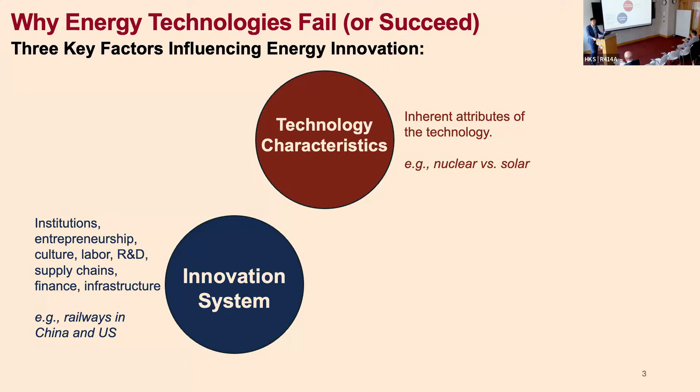That's the first factor. But people can also say that even for the same technology, sometimes one technology works in one country but doesn't work in another. This comes to the innovation system—different institutions, different culture, different supply chains, different financing situations, different infrastructure. One example is the railway system in the United States versus China. People ask why this is, and you can see the difference is different population density, different resources, different infrastructure.

The third factor is public policy. Policy also matters—it depends on what regulations or incentives you can give to people. One example is the development of solar panels. We have to go back to the 2000s and think about one policy that was really important for solar panel development: Germany's feed-in tariff policy, introduced under their Renewable Energy Act. Basically, it gave solar developers guaranteed revenue.

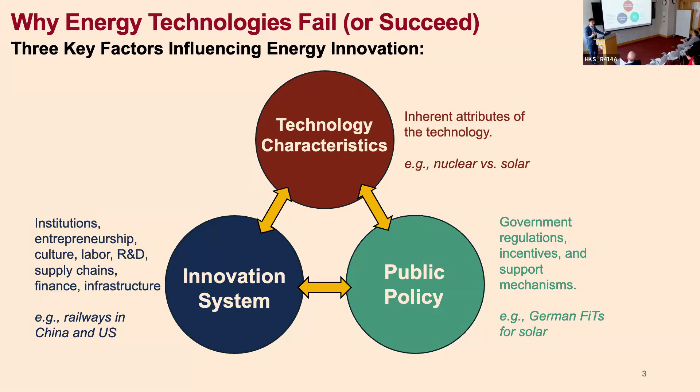When people think about the whole of energy innovation, they're usually talking about the interactions between these three key factors. What I'm going to do today is really simple: tell people a story about nuclear power. I'm not an expert on nuclear power, but rather I'm approaching this problem from the energy innovation perspective.

Speaking of nuclear power, here are some highlights showing this is a hot topic. There is growing interest in nuclear power from the traditional nuclear players. I think nuclear power is one of the few things that gets bipartisan support in the United States, and a lot of new legislation and policies are coming out. In France, the government wants to build six more new nuclear power plants, and you can see the same thing in Japan and South Korea—a lot of traditional players thinking about nuclear power resurgence. On the other hand, you see a lot of emerging countries either building their first nuclear power plants or considering building their first nuclear power plants.

And also besides the public sector, you see a lot of interest from the private sector, especially driven by the demand from AI and also the data centers. Like Microsoft is seeking to reopen the Three Mile Island power plant to power their data center. And Amazon, Google, they are investing in small modular reactors to power their data centers. But anyway, I'm trying to say this is a hot topic, and there is growing interest in nuclear power.

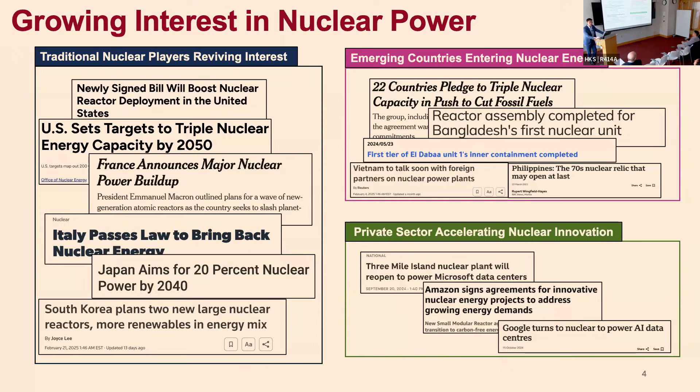But on the other hand, nuclear power is always a debatable issue. A lot of things we can debate, right? We can debate on its safety. Do we want another nuclear accident, a disaster? And other people can argue that the nuclear accident risk is actually pretty low and it's declining because the technology is improving. And what's the role of nuclear power in grid decarbonization?

Some people will argue that nuclear power is cheap, it's a firm resource, it's reliable. But other people can say we can totally do decarbonization without nuclear power. And also its cost and its construction time. Some people will argue that it's really expensive to build nuclear power plants in the United States today. But other people will say, if you have regulatory stability, if you can do standardization, you can make it cheaper and build it faster.

And also on nuclear waste, we still don't have any permanent solution. But people can argue that this is totally manageable and you only have a relatively small amount of waste. A lot of things we can debate, but today I'm really going to focus on the economics of nuclear power. The reason is, I think people have a consensus that the fundamental barrier for nuclear power today is its cost. It's too expensive. I have a quote here from MIT's The Future of Nuclear Energy studies. Their conclusion is the fundamental problem of nuclear power today is its cost. So my talk today is really going to focus on the cost of nuclear power.

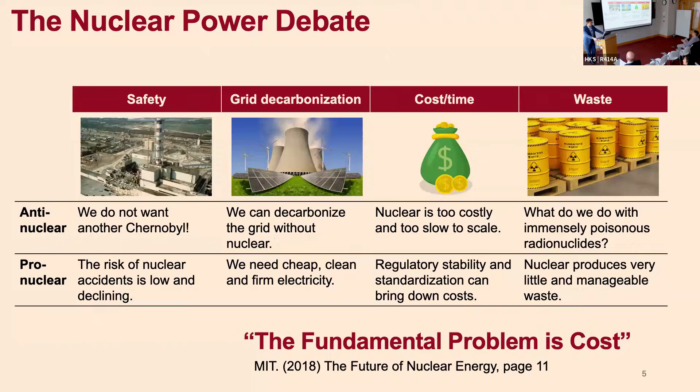Speaking of the cost of nuclear power, it's a form of electricity. And when we talk about electricity's cost, we usually use the LCOE, the levelized cost of electricity. What I'm showing here is a classic equation to calculate the levelized cost. Basically, you have the capital recovery factor and construction cost, operational cost, maintenance cost, fuel cost, and divide all costs by the electricity produced. For nuclear power, its operational, maintenance, and fuel costs are relatively stable. And electricity production is also pretty stable because it's usually used as base load with a high capacity factor. So what really matters in this equation is the construction cost.

And the construction cost can be divided into two parts. The first part is basically everything except the financing cost. People call that overnight construction cost. And the second part is the financing cost, the interest during construction, which depends on your construction time and interest rate. So today my talk will basically focus on the overnight construction cost. And I will also discuss something on the construction time.

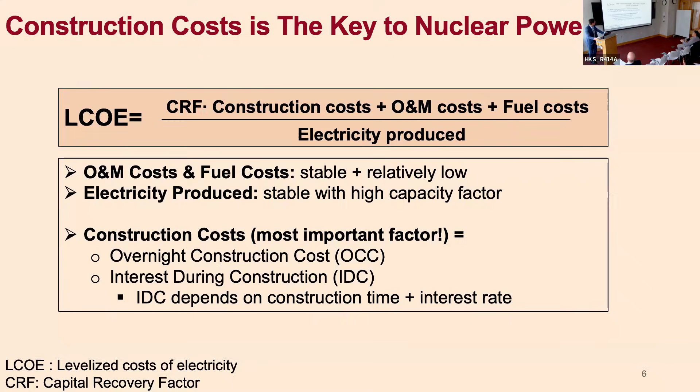The reason why construction cost is a problem is because historically we have observed an interesting and concerning fact, which people call the cost escalation curse of nuclear power. With a lot of technologies, like solar, wind, batteries, electric vehicles, when you build more, you can build cheaper. But nuclear technology is very different. Historically, when you build more nuclear power plants, you build them more expensive.

What I'm showing here is the overnight construction cost of nuclear power in the United States. And you can see the cost increased dramatically over time. This one is Vogtle, the two nuclear power plants commissioned last year in the United States. It's very expensive, about $15 per watt. One thing I want people to notice here: the cost increase happened before the Three Mile Island accident, and it increased dramatically after the Three Mile Island accident.

The reasons for this cost escalation in the United States: the first is, it's very interesting, it's a fragmented market. Every nuclear power plant in the United States is built differently, so basically a lack of standardization. The second thing is the labor cost and the material cost were increasing over time. The labor productivity is decreasing over time. And for the material part, if you build a nuclear power plant, you need a lot of steel, a lot of cement. In many cases, you need special steel and special cement for nuclear power, and that special steel, cement, concrete is getting more and more expensive over time. Another thing in the United States is the regulation.

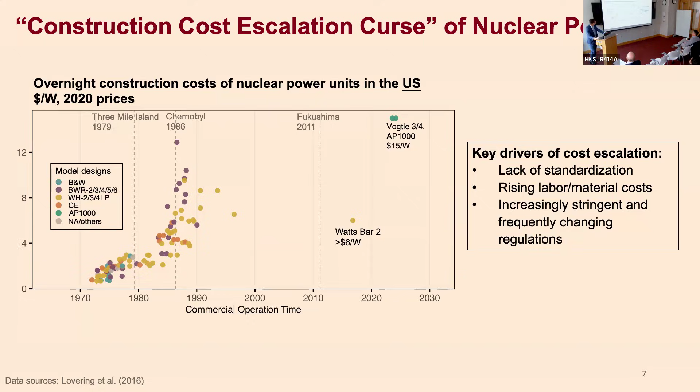And why are they switching to more expensive models? One thing is that nuclear power plants get larger and larger, and simultaneously more and more complicated. One reason it got complicated is that the French company introduced the technology from Westinghouse, and that's US technology. And they wanted to give it some French style, to make it more innovative. And when you make it more innovative, you make it more complicated and increase your cost.

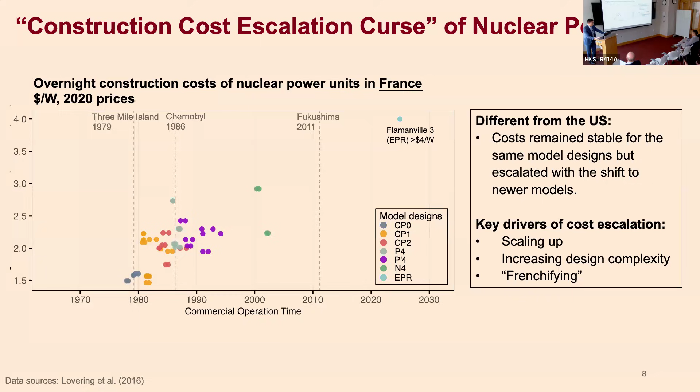So the problem here is we have observed this cost escalation problem. And the debate is: is this a technology problem, or a policy or innovation system problem? Remember the three factors here. I think this debate is really important because if this is an inherent nature of the technology, like nuclear power is a bad technology, what we should do is redesign the technology. And if this is more a policy or innovation system problem, that's another direction. We should redesign the policy and innovation system.

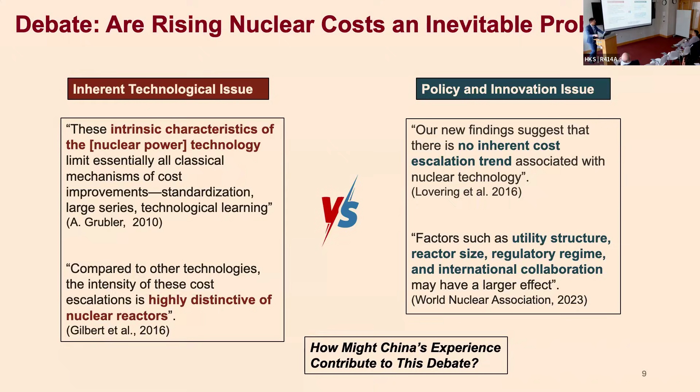And when I look at this debate, what I'm thinking is that maybe China's experience on nuclear power can contribute to it. The reason I think the Chinese experience is valuable is not only because I'm Chinese, but also if you look at the recent nuclear power expansion, the left figure shows global operating capacity since the 1970s. You can see the largest country today is the United States, the second is France, the third is China. And most countries actually stopped building nuclear power plants after the 1990s.

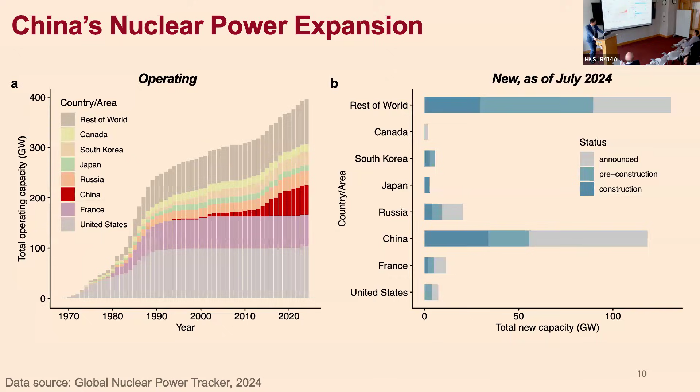And China is the only country that has substantially expanded its nuclear power capacity over the past two decades. The right figure here is new capacity. You can see China is constructing a lot of nuclear power plants, and a lot are in the pipeline. So I think it will be pretty interesting to think about what happened in China. Is there any cost escalation in China?

Before I go into any detail, let me tell you my data source and methodology. Collecting cost data for nuclear power is challenging everywhere, and it's basically impossible everywhere to get third-party audited data. People usually rely on gray literature, like news reports, to get the data. That's how people get the data for the United States and France. And I do the same thing for China. The advantage is I can read Chinese, so I have a lot of sources.

So basically, I use a lot of data from news, industrial reports, and statistical yearbooks. I actually get a lot of data from environmental impact assessment reports, because before nuclear power plants start construction or operation, they need to submit an environmental assessment report to China's environmental department. And their reports usually say the total investment for this project is so many billion. So I get a lot of data from there, and also from interviews.

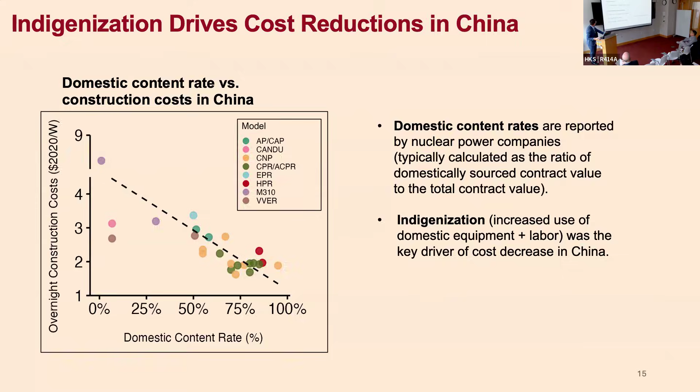And another thing I want to persuade people is that a lot of conventional mechanisms, as I said, that work for solar, wind, or batteries, don't work for nuclear power. The first thing is the reactor size, or what people call the economies of scale. Basically, there are two contrasting arguments.

One, people can say you have the economies of scale, because if you build larger nuclear power plants, you can increase the building efficiency, and you can spread your fixed costs over a larger capacity, so you can lower your cost. But on the other hand, you also have the diseconomy of scale. That's when you build larger nuclear power plants, they also get more complicated, more complex. So you have the mega project syndrome, which increases your cost.

Historically, what we observe in the United States and in France is that the diseconomy of scale usually dominates the process. So it's more likely the current nuclear power plants are too large. I think this also motivated people to think about the SMR, the small modular reactor, or smaller nuclear power plants.

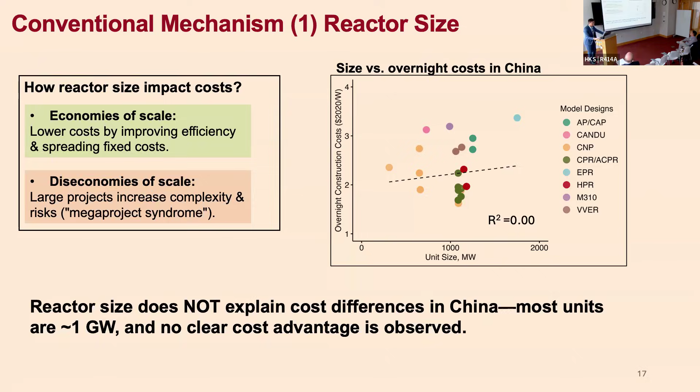But anyway, in China, this isn't really important, because what I'm showing here is the relationship between size and overnight cost. Here, actually, a lot of nuclear power plants overlap. Basically, in China, most nuclear power plants are about 1 gigawatt, and reactor size isn't really important here. That's the first part. The economies of scale aren't really important in explaining the cost trend.

The second part is learning by doing, and I think that's a hot word. People talk about how learning makes solar cheap, makes batteries cheap, makes wind cheap. But I would argue that the learning effects for nuclear are very limited, and it's really because of the inherent nature of this advanced nuclear power.

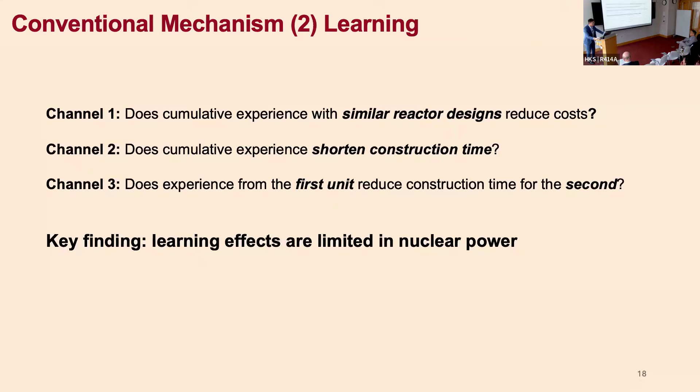And we basically explore the learning effect through 3 channels; I will discuss them one by one. Basically, learning means if you have cumulative experience, more experience, can you build nuclear power plants cheaper or faster? So let me first talk about the first channel. The hypothesis is that if you have learning, cumulative experience, probably you can make it cheaper when you build nuclear power plants with a similar reactor design.

And if we go back to the figure, most of the Chinese nuclear power plants today actually use 2 models, the CNP model and the CPR model. So my question is, is there any learning in the CNP model or the CPR model? For the CNP model, my result is that the learning rate is not statistically significant. And the cost going up and down here can actually be explained by the indigenization process pretty well.

And for the CPR model, I think the CPR model is concentrated in southern China and is more standardized. So we do observe some learning, but this learning is really a mixed effect of learning by doing, the indigenization process, and also the multi-unit siting. And you can see the CPR model at first had 2 units simultaneously, then 4 units, and 6 units. And I think that also helps the cost reduction of the CPR model. But this is also only suggestive evidence.

Because we do not have any detailed data, we think maybe we should not look at the cost, but rather look at the construction time. For construction time of nuclear power plants, the data are accurate and widely accessible. So our question here is: if you have cumulative experience building nuclear power plants, can you build it faster?

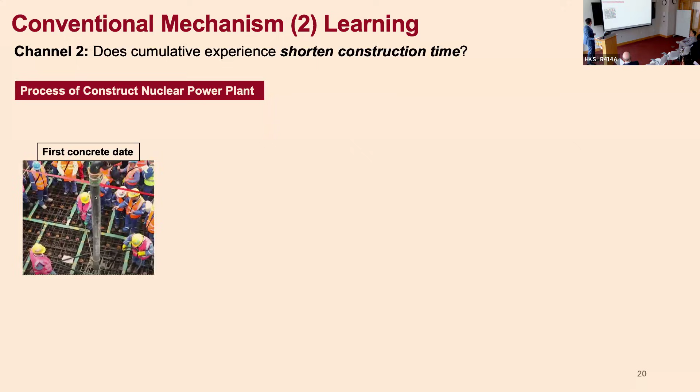Before I go to the results, I need to tell people how to build a nuclear power plant. That's some skill people can learn. Basically, if people want to build a nuclear power plant, the first thing is you need the first concrete date. That's the symbol of the start of the nuclear power plant. You pour the concrete into your reactor site, and that shows people you start building the nuclear power plant.

Next, you do a lot of construction, like the reactor buildings and a lot of infrastructure. When you finish the work, you start to install the dome. I always think that's a really fancy process - you lift up the dome and position it exactly on the reactor building.

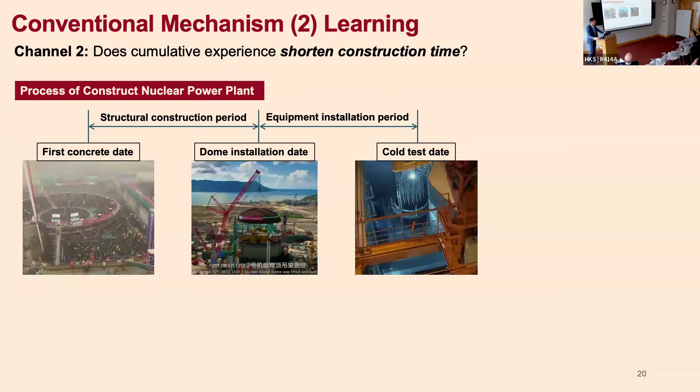After that, you finish all your structural construction and start to install equipment. There's a lot of equipment like nuclear reactors, the steam system, ventilation system, and you install all this equipment into the nuclear power plant. Next is the testing and commissioning stage. You start with the cold test and the hot test, and you load the fuel and test the nuclear reaction. After that, you do the commercial operation.

So basically, that's how you build a nuclear power plant. Most Chinese nuclear power plants follow the 3 stages: structural construction, equipment installation, and testing and commissioning. Usually they have different firms to do this work.

For construction, you will have the construction firm do the structural construction. For equipment installation, you will have the installation firm. And for testing and commissioning, that's usually conducted by the owners of the nuclear power plant. So our thinking is: if there is learning, those construction firms or installation firms probably have cumulative experience, so they can build nuclear power plants faster. That's our hypothesis, and let me show people the data here.

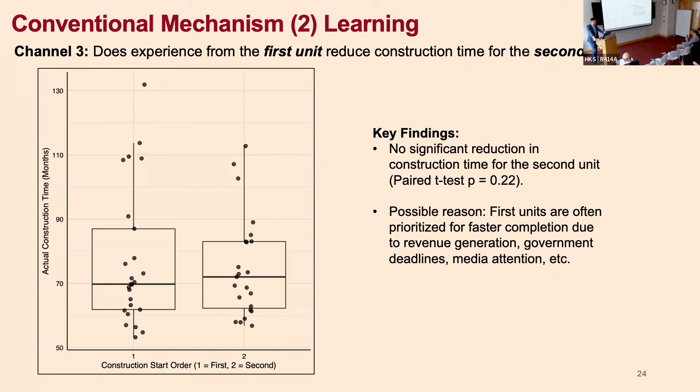Historically, we haven't observed any evidence for that in United States, in France, and also in China. That's a

Second mechanism. The third mechanism is change in the construction time. What I'm showing here is all the construction times of all nuclear power plants globally from 1960s. Basically, the construction time for nuclear power plants in the United States nearly doubled from 1960s to 1990s, and also doubled in France. But in East Asian countries, in Japan, China, South Korea, the construction time was relatively short and relatively stable. So still in China, this is not a key factor.

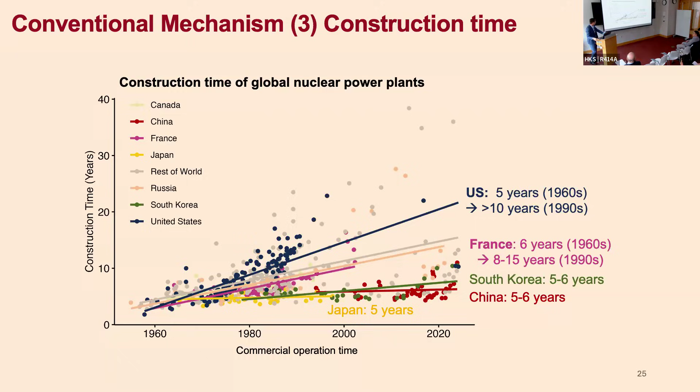So I hope I persuaded people that the Chinese construction cost was decreasing over time. This decreasing was largely driven by the supply chain build out and labor cost. It's an indigenization process. A lot of conventional mechanisms we use for solar, wind, battery don't really apply here.

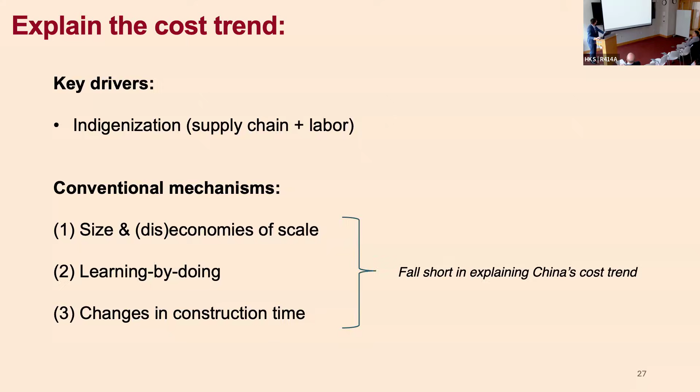Finally, I want to answer some frequently asked questions. The first question is about the export of Chinese nuclear power. Can China export cheap nuclear power plants to other countries?

My idea is that the cost trend we observed in China is really an innovation problem. It's an innovation system and policy problem. So what happened in China does not really apply to other countries. One example: the only country China has exported nuclear power technology to is Pakistan. The data shows that if you build the HPR model in China, it's about $2 per watt, but if you build the same thing in Pakistan, you double your cost. So this is really an innovation and policy problem. And currently, Russian technology still dominates the international nuclear export market.

The second thing is, it's not surprising that Chinese nuclear is cheaper, right? Everything in China is cheap. Chinese solar is cheap, Chinese wind is cheap, Chinese energy storage is cheap. For China, the real question is: can cheap Chinese nuclear power compete with cheap Chinese renewables and storage? The IEA has an estimate that Chinese nuclear power must reach $2 per watt to compete with renewables and storage.

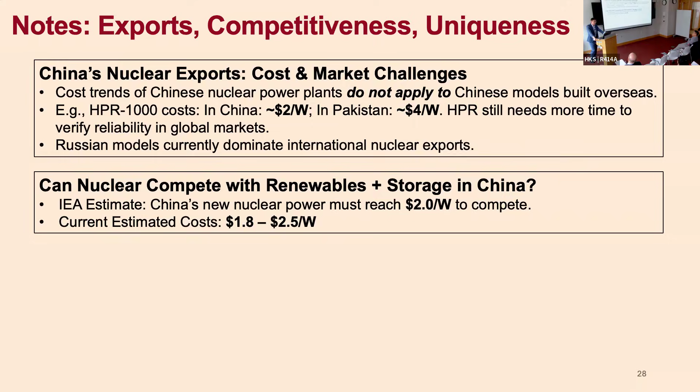Based on my data, currently nuclear power is roughly in that range, from $1.8 to $2.5 per watt. And the third question is: is this a unique story to China? Is this a Chinese story?

I'm actually not sure. What I'm showing here is that I think South Korea probably also has a similar experience. This is from previous literature, but I cannot read Korean, so I cannot really validate the data. But I really think what happened in South Korea will be very similar to China. You first introduce technology from the United States, from France, and start building your domestic model, getting cheaper and cheaper. That thing is probably in common with South Korea and China.

The Japanese story is very different, but because of limited data, it's really hard to say. I think it's really important to understand the difference between South Korea, China, and Japan, because they all have centralized supportive policy for a long time, but their performance is a little bit different. But anyway, this is really just suggestive evidence. I do not have enough data to say that conclusively.

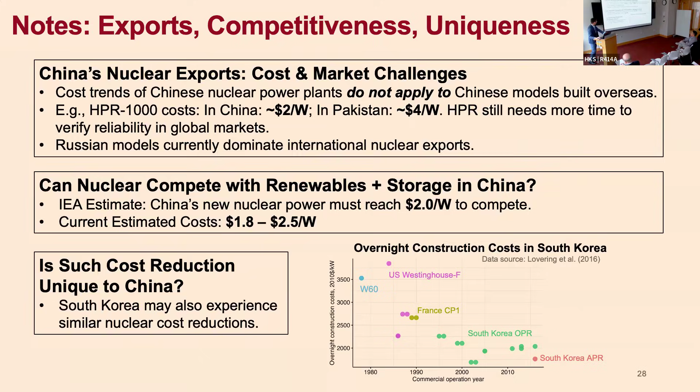So finally, let me conclude this presentation. The key question here is: what's the nature of this cost escalation curve? I think people can already feel that this is a mixed or combination effect of the nature of the technology and the system policy problem.

On one hand, nuclear power is a very special technology. It's large scale, it's lumpy, it's risky, and you need to put a lot of money into capital investment. And it's also a strategic technology.

By strategic technology, I mean many times the company wants to make it more innovative to show that it's their achievement. And in this case, they actually make it more expensive. That's the characteristic of this technology.

But on the other hand, we also see differences in the innovation system, like in France, South Korea, China—that's a centralized regime—and in the United States, that's a fragmented regime, with different supply chains. And from a policy perspective, we also see different regulations and different financing policies.

So the final takeaways: basically what we observe is historically the cost escalation curves, especially in the United States. The United States is really special. The cost increased dramatically, and this is not a global phenomenon.

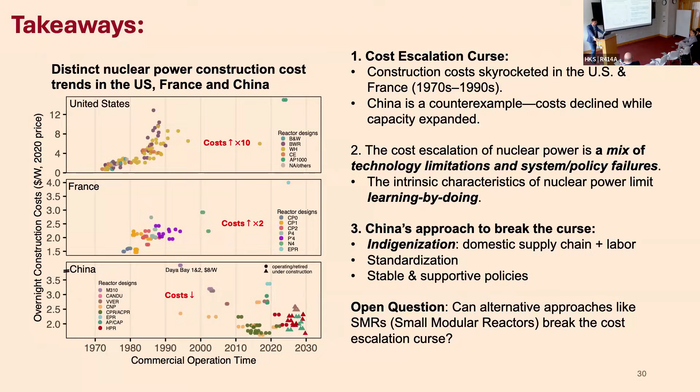And with that, I'm happy to answer any questions.

Thank you very much. I'm going to take the prerogative of, as the moderator, to ask you the first one. This is a great overview, but I'm still a little puzzled about a couple of things.

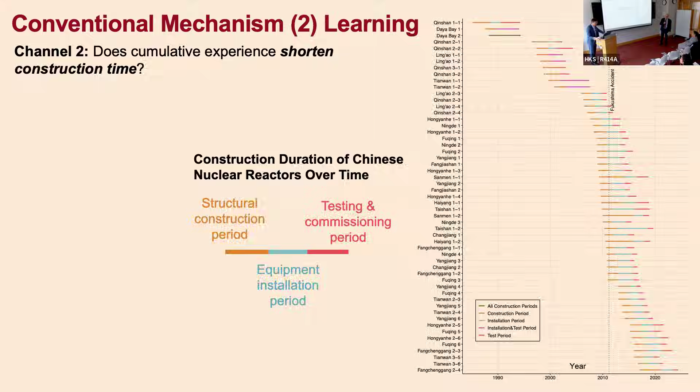The first is that if you go back 10 years, China was very optimistic about how many nuclear plants they were going to build, and about every 5 years that number kept being reduced. Right now, if you look at present projections, by 2040 China has about 8% of their power from nuclear, which is significantly less than the 20% we had in the United States a few years ago. I think it's a little less now. The other thing that puzzled me is why there's been this decrease in enthusiasm that nuclear was going to solve the electricity problem for China?

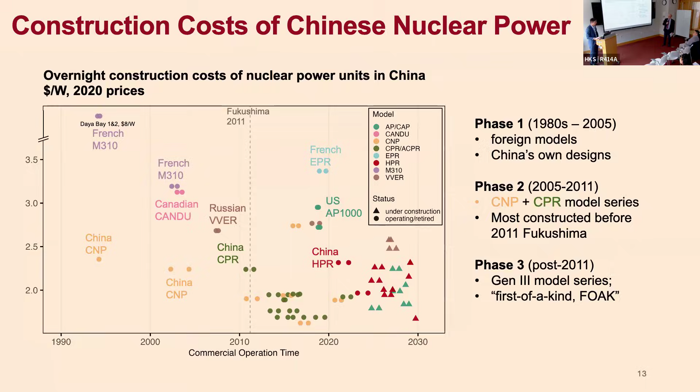The second part of this question is you talk about how it's double the price to build Chinese nuclear plants in Pakistan. I noticed that South Korea just built 4 nuclear plants in the UAE for about the same price they built them in Korea. So why is it so much more expensive for China to export compared to South Korea? But I'm very interested in the answers to both of these.

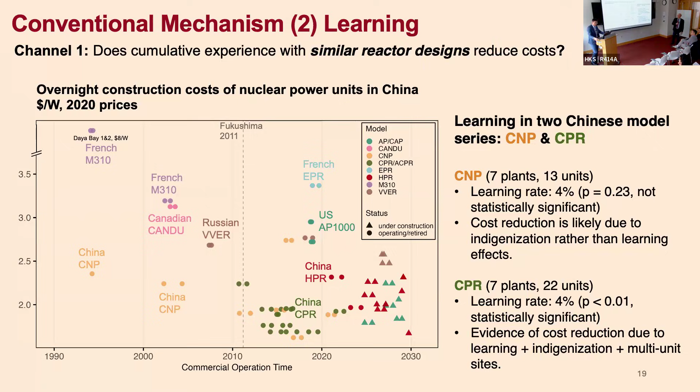Thank you for the questions. The first one is about the ambitions in nuclear power build-out. I feel the first thing is you need to understand who sets the goal. Sometimes if you read the reports from the nuclear power industry, it's really ambitious, but other times you read reports from the renewable community or other electricity community, and those are different goals.

For the government goal, there's only one goal that was set in 2005—that's really ambitious. After Fukushima, China actually lowered that government goal. But my feeling is that over time, the Chinese usually say nuclear power should account for 5 to 15% of total electricity. That's usually their goal over time, and I think it's relatively consistent—no one talks about 50% or 60% for nuclear power plants in China.

For Pakistan versus South Korea, I don't have any data, but I think one thing is the HPR model China built is a relatively new model. China only commissioned the HPR model—I think that was in 2021. So that's a new model, and you do a lot of testing with it, but the South Korean technology is probably more mature. Definitely that's all suggestive, and the cost data is really challenging to get a clear answer on.

All right, I'm opening it up. Work my way back.

All right, thanks. Great talk.

Question. Let me push you a little bit on the notion of a declining trend in China. First of all, have they pretty much finished indigenization so that there's not much further they could go with that? And secondly, it looks to me from that graph, except maybe for two dots of the HPR, that in general...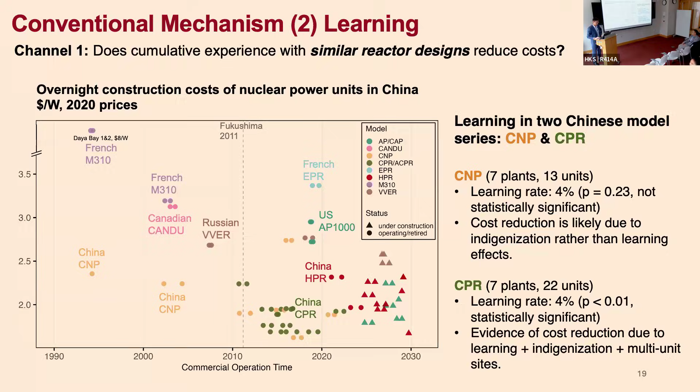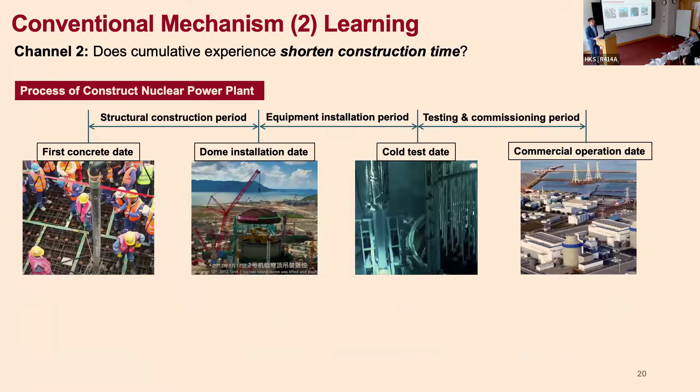Just a question going back to construction. In terms of risk ownership during the construction process, it seems like a lot of the problems are driving from a company -- Westinghouse runs into a problem, cost overruns, and then they run out of money, go bankrupt. How is that different in China? Is there more government stepping in and owning the risk so that the company doesn't own all of it during the construction process, or is something else going on?

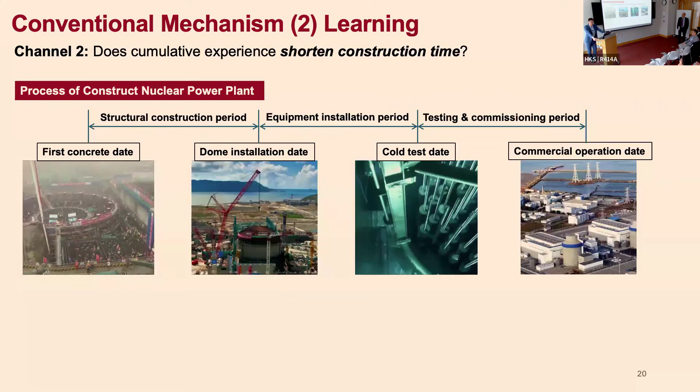I think if you build nuclear power plants for 10 or 15 years, that's probably a really big concern. But relatively, what I'm showing here is the construction time in China is relatively short, within a reasonable range. So their capital cost is low because construction time is low, and their interest rate is low because they are state-owned companies. So basically, that's not a huge problem here. But you can definitely debate whether this is because of the system, or private versus state-owned company, or what really contributes to that difference.

People will argue for nuclear power. I think the first important thing is actually not construction cost, it's the interest rate today. They get really high interest rates in the United States and France. So how to lower the interest rate is basically the first question when you think about building new nuclear power plants. And I think that's system stuff and policy stuff, rather than technology itself.

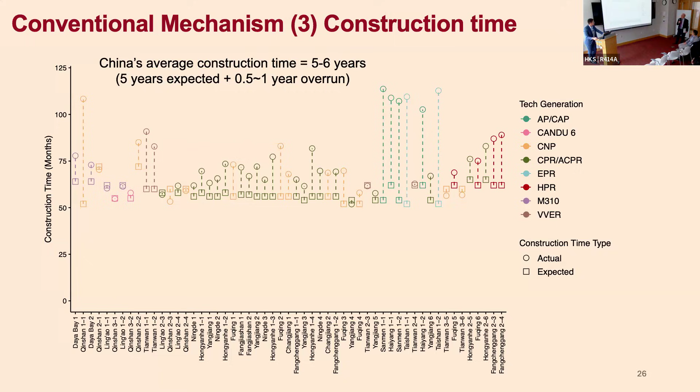I will ask you a couple more questions. The first is, I noticed that most of the Chinese nuclear plants are built on the coast, and they have not built, as far as I know, any inland. So water seems to be a big concern. In the United States, we have nuclear power plants all over the place. So I was wondering, what has been the impediment to moving nuclear power off of the coastline?

And my second question is, you talk about the interest rates that these facilities are able to get. If I am a manufacturer of the supplies that go into a nuclear plant, am I also a state-owned enterprise primarily, or is most of the supply chain in China owned by the state as well as the actual construction of the facility?

The second question, that's basically true -- most of the companies along the supply chain are state-owned companies. And the first question: before Fukushima, there were actually a lot of nuclear power plants in the pipeline in the inland area. People don't do that after Fukushima -- if you have seawater, it's safer.

One thing that's really interesting is I think currently the Chinese nuclear power industry is thinking about building nuclear power plants inland. The evidence is you can see most of the nuclear power plants today are in the coastal area and use seawater cooling. But if you want to move inland, you need to use a cooling tower for that cooling system. The most recent Chinese nuclear power plants are using water cooling tower technology rather than seawater cooling. That's a symbol that they actually want to test this technology and build inland.